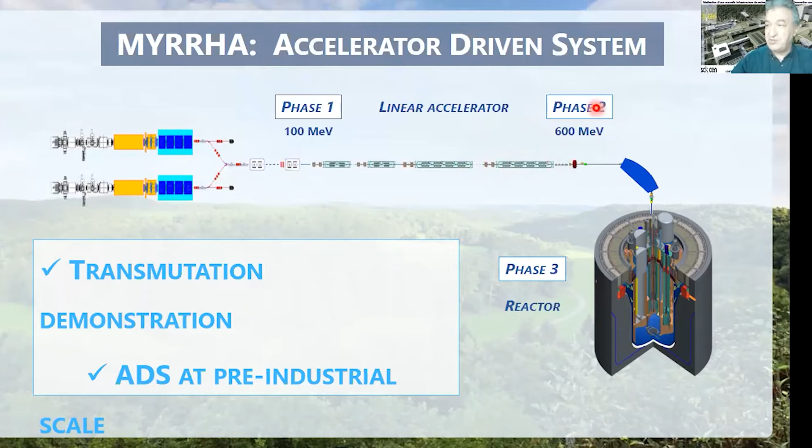We couple it to an experimental facility - I'll come back on that. Phase two is upgrading the accelerator to 600 MeV, and phase three is the reactor.

So the portfolio of applications of this ADS MYRRHA experimental machine is manifold: medical radioisotope production, fission energy Gen 4 systems where we look for materials we could need for these futuristic systems, and fundamental research thanks to the large accelerator we have. Fusion material is also a big challenge, so we create conditions where we can test materials for fusion.

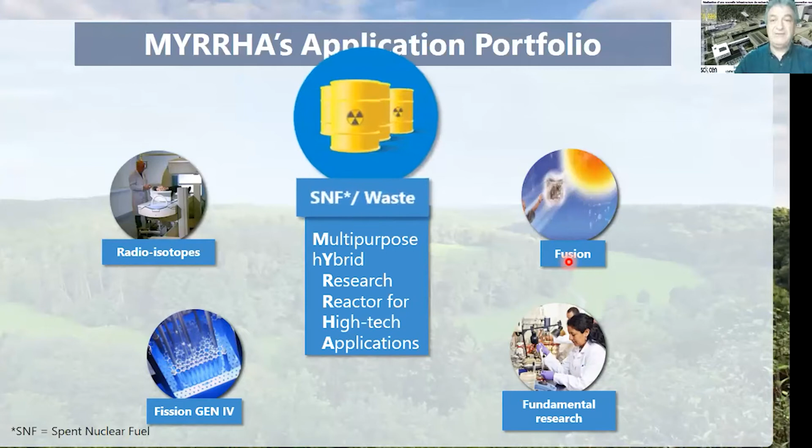But the major application, the flagship application, is the treatment of spent nuclear fuel or nuclear waste. What we are willing to do, actually - when we use nuclear fuel in our power plants today, in thermal reactors...

We are using oxide fuel containing uranium-235 and uranium-238, with an enrichment ranging between 3.5% to 4.5% of uranium-235. When you shoot neutrons on this U-235, you create a fission that gives you two fission products and, on average, about 2.3 neutrons.

And one of the neutrons, you would like to keep it to make the next fission. That's why we speak about a chain reaction.

But we have the other isotope of uranium that can capture a neutron and become a heavier element. The heavier elements we create are, first of all, neptunium, which decays to plutonium, then goes further to americium by capturing a neutron, and curium. Plutonium we call the major actinide, and these three others we call minor actinides.

These minor actinides, and also plutonium, are a burden in the nuclear waste if you are not doing reprocessing. Some countries do reprocessing, some don't, but you can retrieve the remnants of uranium in your fuel and the plutonium and reuse them to make fuel again. You leave in your waste flow the minor actinides plus the fission products.

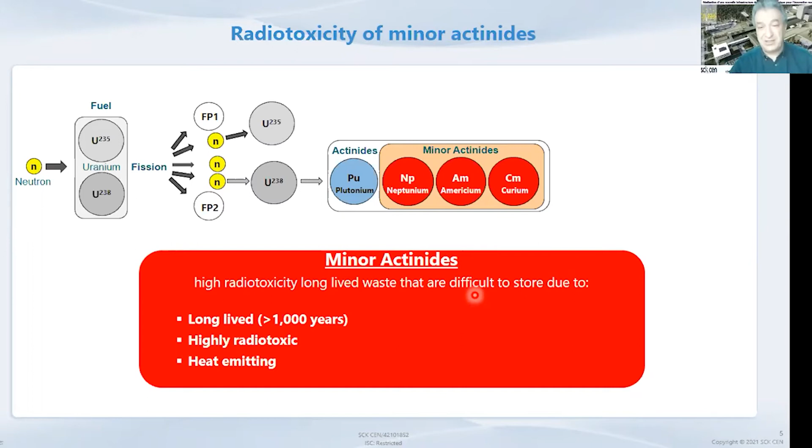These are the ones causing us very high radiotoxicity and also a heat load in our nuclear waste, which then conditions the dimensions and footprint of our geological disposal, if we go to geological disposal.

And how this translates: as I said, putting uranium ore in our present day reactors increases the radiotoxicity by a factor of 1,000. You can't do anything about it, that's the way it works. If you just take that used fuel and put it underground, it will take about 300,000 years to get back to the original radiotoxicity of the uranium ore you took from nature.

You do reprocessing, meaning you retrieve uranium and plutonium and refabricate new fuel with that. This is an existing technology, there is nothing to invent, it is applied in various countries. We applied it in Belgium during a certain period.

We applied it in Switzerland, MOX in the reactors. We do it in France today. We have done it in Japan. So this is in light water reactors.

But originally, the MOX was foreseen to go in fast reactors. We didn't develop the fast reactors rapidly enough, so we said we can already start doing reprocessing and recycling in the existing reactor technology.

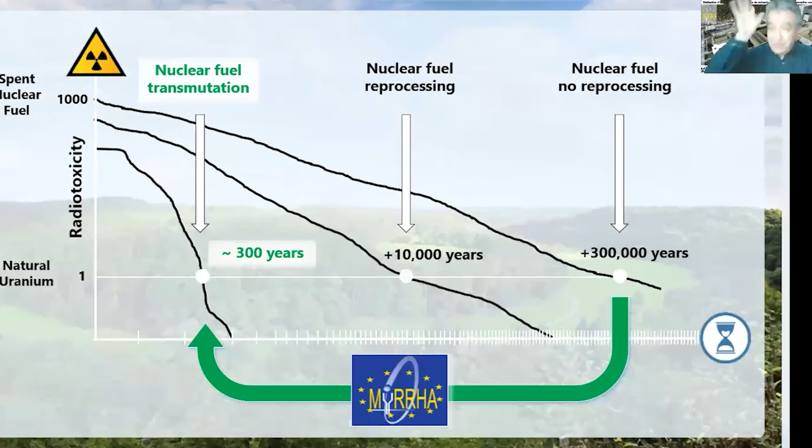But today I will not lecture about the transmutation and the waste management. I wanted to focus on the accelerator specificity for ADS. These are the characteristics of the MYRRHA accelerator: 600 MeV, 4 milliamp, but CW.

And this is, you can say, technology that exists today and we use it for this kind of application, but CW high current like this, and not in pulse, that is what is tricky for us.

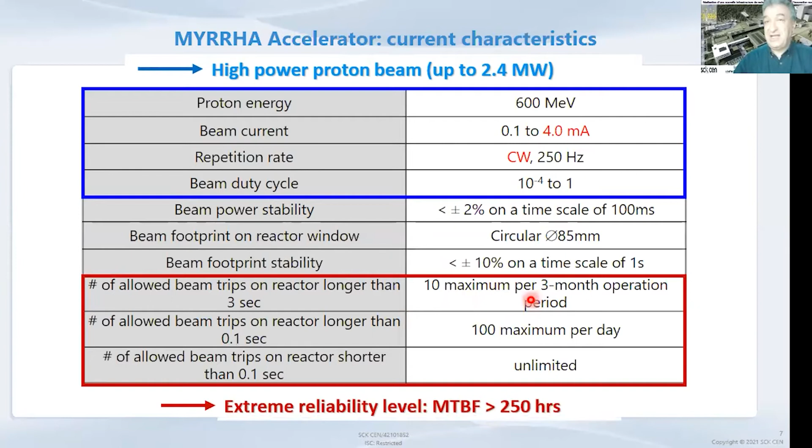And even more demanding is the reliability of the beam we are requesting. Because as I said, if we shut down our accelerator, the reactor will stop, so we are not making any transmutation then.

Today when we look at the large accelerators like the one we are willing to realize, if I look at J-PARC, we were monitoring the number of beam trips there, as well as SNS in Oak Ridge. We found that compared to what we are demanding in beam trips longer than 3 seconds, where we would like to have 10 maximum per 3 months of operation, we are 2 decades below what today's large accelerators are doing. So we need to improve this reliability drastically.

Shorter beam trips we can manage with the thermal inertia of our reactor. But these longer trips mean what we call in classical reactor jargon a scram, an unforeseen shutdown of the reactor. Then you need lengthy procedures to respect from the safety point of view, and it can take between a few hours up to 2 days before you can restart.

And if I take J-PARC or SNS, they trip about 2,000 times per year. This means if I just take half a day to restart, I would need years on Earth of 1,000 days, which is not the case.

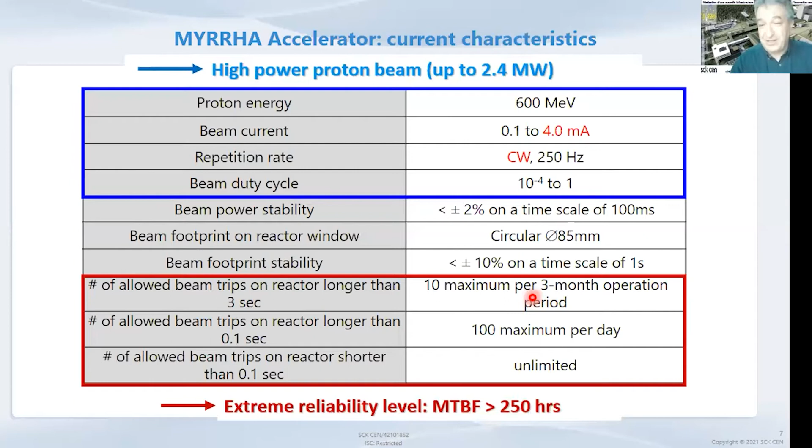So we need to improve this reliability. And so the idea to improve...

I don't know what happens with this slide. It was supposed to be... let me see, why it doesn't show... sorry.

Oh, the figure disappeared.

I apologize for this, I don't understand. It was working just a few minutes ago.

But nevertheless, that gives you an idea. We have larger accelerators in terms of current and energy, but there are existing machines of the kind we are targeting to make. So what we have decided to do is to demonstrate this reliability. We worked very hard on the individual components. I will come back on this.

But what we decided in 2015, we said we will create MYRRHA in 3 stages. Phase 1, the accelerator up to 100 MeV, but with 1 injector line, not 2. The double injector is to create redundancy in the low energy part to achieve this reliability we are targeting. And from 17 MeV to 100 MeV, we will go with spoke cavities. I will come back on this.

And then from here with niobium elliptic cavities, maybe in this part between 100 to 200, we are watching what's going on in the ESS project with the double spoke cavities that they are testing for the moment, if this can do the job. And the idea is to have the first experimental facility built by 2026 on the site of MOL, and then go further for phase 2 and phase 3. Spreading this investment will reduce the technical risk about the reliability.

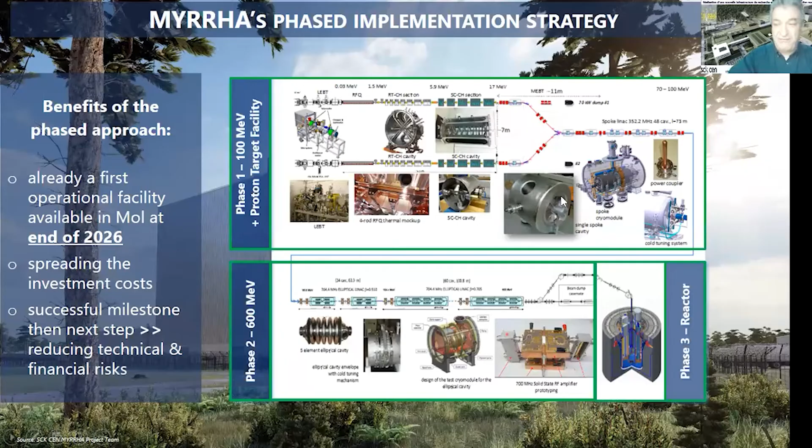So the fault tolerance, we apply it up to 17 MeV by redundancy. So duplicating the injector up to 17 MeV, and we switch between the 2 injectors. We keep the second one in hot standby, but we operate only with 1. And if we lose the injector, we switch on the second one instantaneously.

From there on, serial redundancy will be applied in the superconducting spoke cavities. We have many identical cavities which are in series, but we do not exploit them at full capacity. We derate those cavities to, let's say, 70–75% of their maximum capacity. And if we lose a cavity, then we do a local compensation, but we then need a very rapid adaptation of the adjacent cavities in terms of gain in acceleration.

And so this will allow us to reach the beam trips we are targeting, of about 10 at maximum in 3 months. You will ask me why 3 months? 3 months is the operating cycle of the MYRRHA subcritical reactor. And we wanted in that 3-month operation at maximum 10 scrams, if I can call them this way in my jargon of reactor people, which is still high, but for an experimental machine, it's okay. We can live with that.

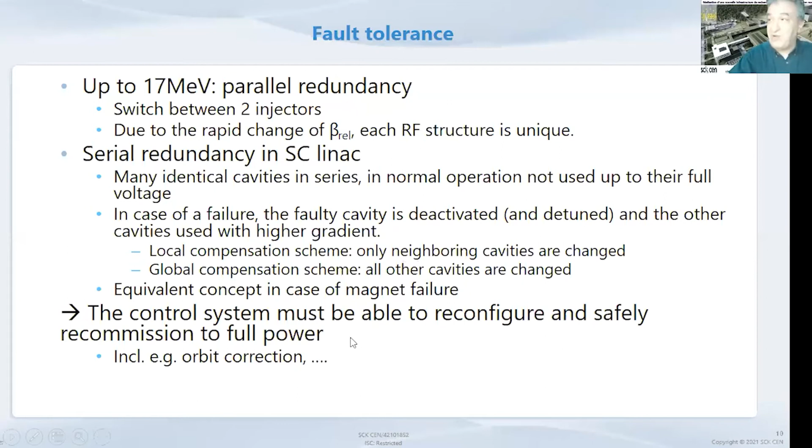And to demonstrate that, as I said, we will build stage 1, the 100 MeV accelerator with 1 injector. And all the components have now been created, prototyped and tested. This is the ECR source you see. It is now operational at the site of Louvain-la-Neuve, with the low energy beam transport line.

The RFQ has been designed together with the German colleagues from IAP Frankfurt. These are with the colleagues of Polytechnique for the source and LEBT with LPSC in Grenoble. The CH cavities also with IAP Frankfurt and Bevatech. We have designed them and prototyped them, and this is already operational in Louvain-la-Neuve. We are busy with the CH cavities to install them also in there.

From there on, we go for spoke cavities. We have 2 spoke cavities per cryomodule. We prototyped those, we tested them individually, and now 2 other new ones have been prototyped that will go in a cryomodule for testing in the prototype cryomodule, which is also created.

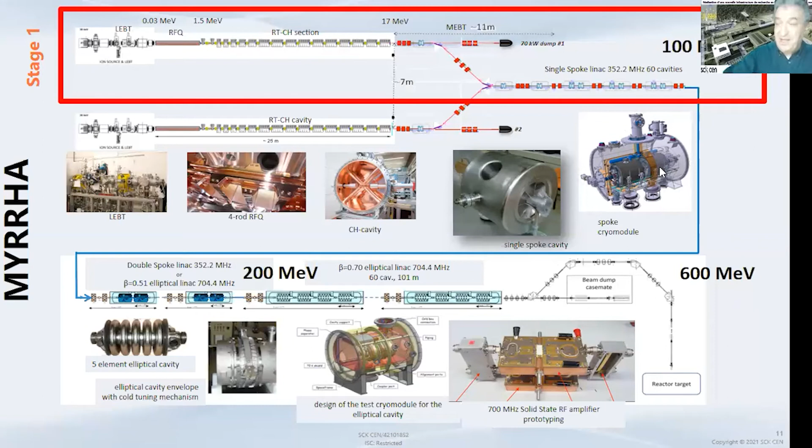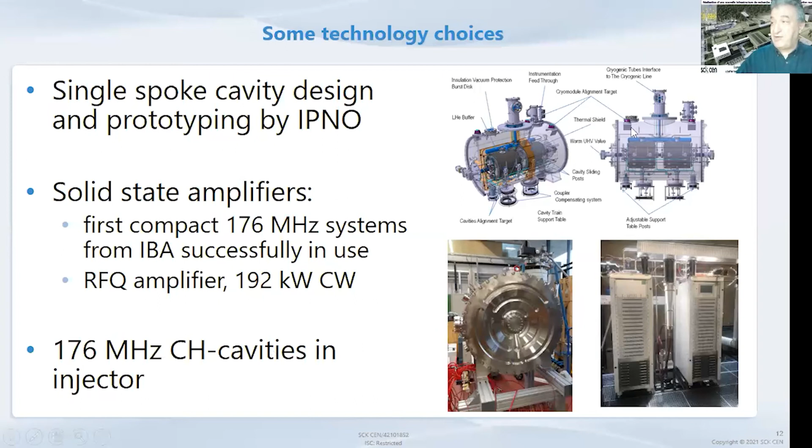So the single spoke cavities were designed and prototyped by IPNO in Orsay, as I said, and the solid state amplifier, first compact, 176 megahertz from IBA. These are solid state amplifiers, and also the CH cavities for the injector have been prototyped. The cryomodule is also now prototyped. I will come back later on this.

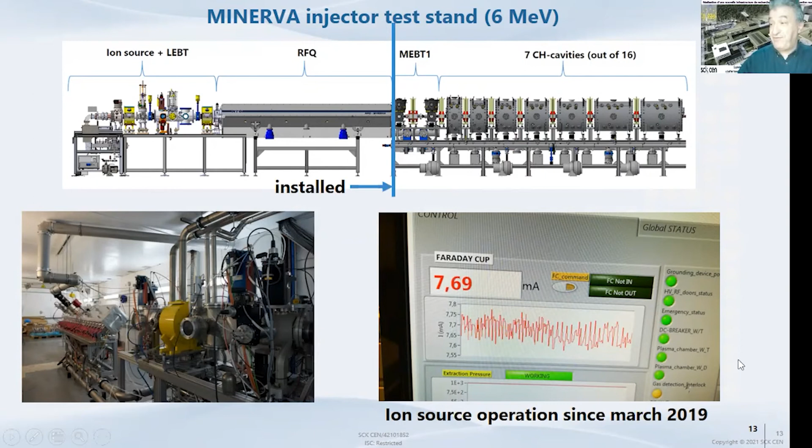So this is installed already in Louvain-la-Neuve, and the CH cavities will be tested also in there. You see the casemate where we are in Louvain-la-Neuve, the ECR source and the RFQ, and normally we can go further there with the CH cavities. This is the first ion source operation in 2019.

Then this is the PTF as it will be looking, the proton target facility. You see the entrance of the beam.

Sorry, I have to activate back my laser.

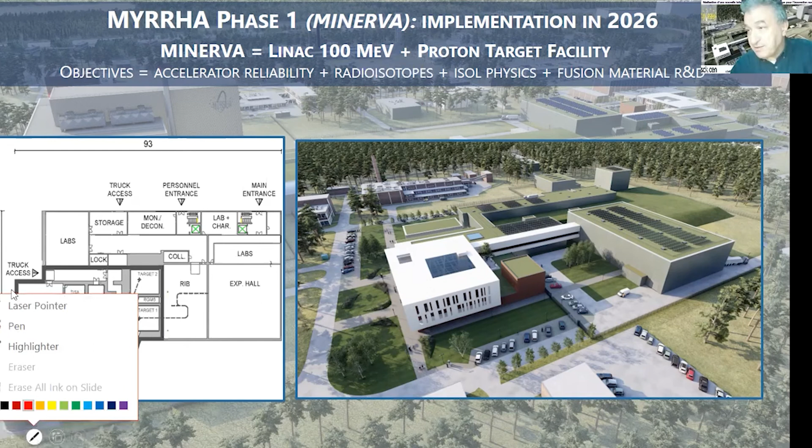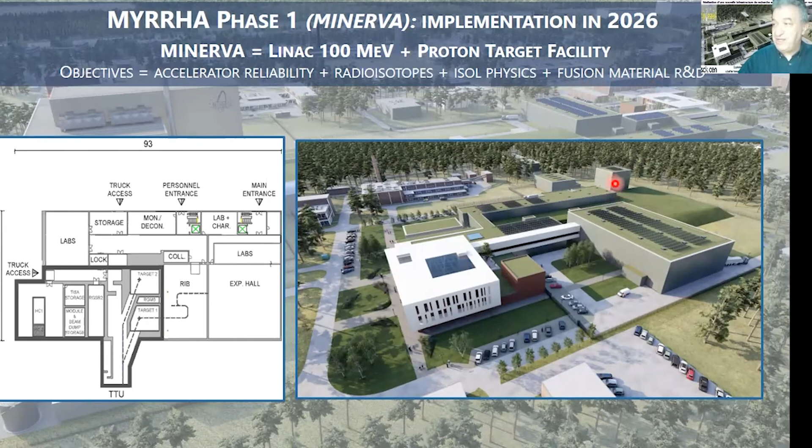So the beam line is going further on towards the reactor, which is over there. And here we enter in the PTF, and we will have a radioactive ion beam, an ISOL system, as well as normal irradiation with protons. And we have an experimental hall in this building. We will have a fusion target also in a separate building, because here we do fusion material; it will be combined with our full power beam dump.

This is the footprint that we will be having. What we call Minerva is phase one of the accelerator, the PTF and the full power beam dump, also combined with the fusion target. And then later on, stage two, the MYRRHA accelerator continuation. The RF gallery is in here. Then the reactor building is over there.

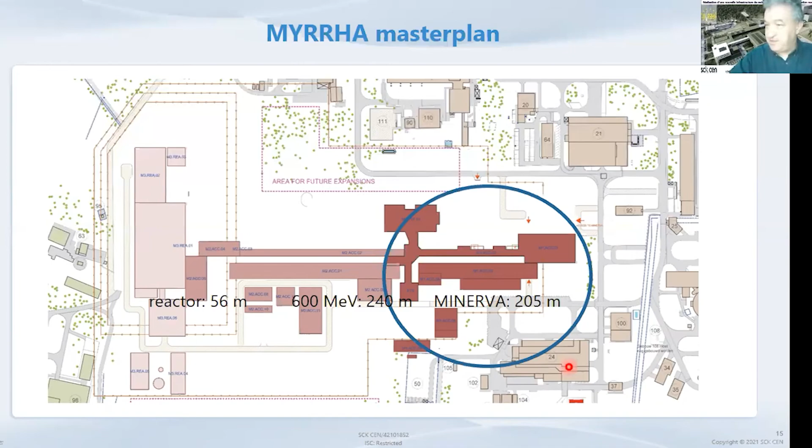This is how it will be implemented on our site, the master plan. Those are existing buildings, and our BR2 research reactor is over here. And these are the material testing labs, hot labs, like at PSI, Andreas.

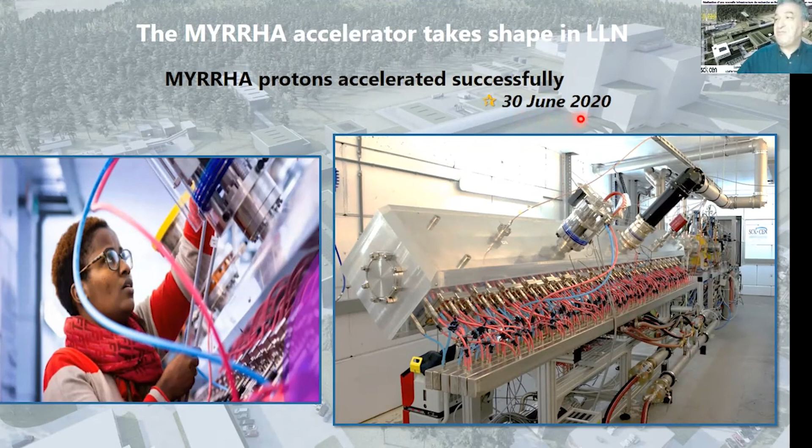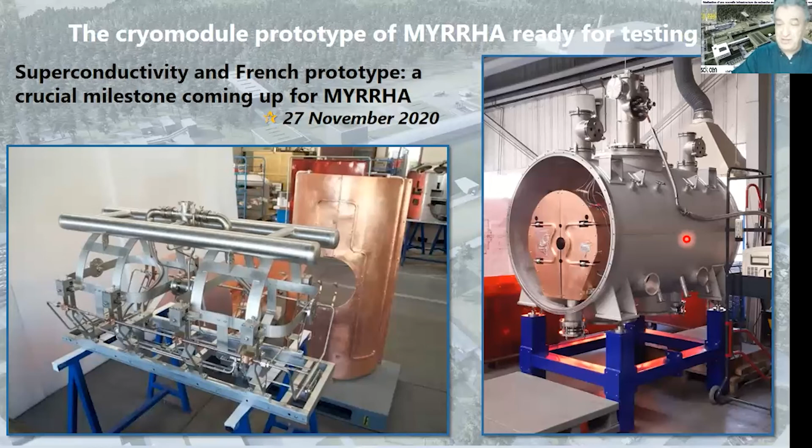So the RFQ was installed, and the first protons were accelerated on the 30th of June 2020 already. Then last year, despite COVID, we could successfully create the prototype of our cryomodule with French colleagues of SDMS. And it is now shipped to the lab where the testing will be conducted. It's also in France.

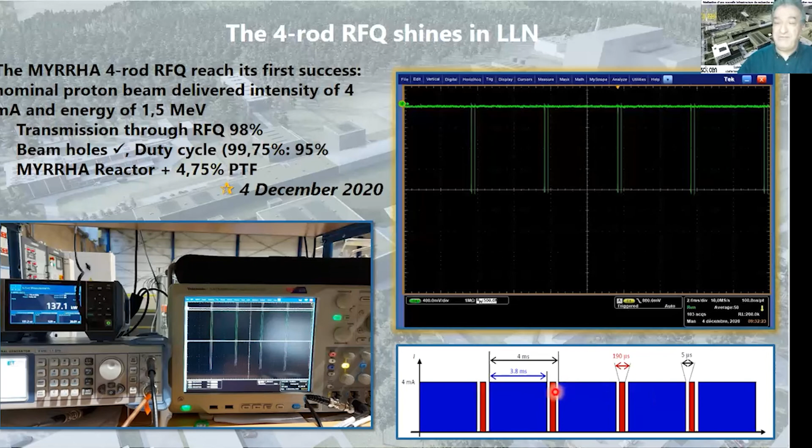And the testing of the RFQ at the conditions of MYRRHA was achieved in December last year, where we showed that we can accelerate up to 1.5 MeV at the exit of the RFQ with transmission of 98% through the RFQ. The beam duty cycle is what we were expecting, and also these holes: I told you it's CW, but every 4 milliseconds we need a hole in the beam of about 200 microseconds, needed for measuring the subcriticality level of our reactor. And we showed that we can do this correctly with our accelerator. So all this is very promising.

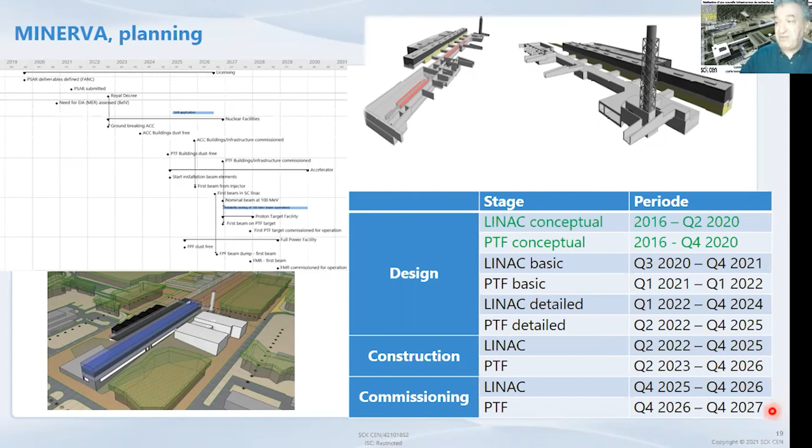Well, now depending on the impact of COVID, we are seeing some delays, so we are assessing how much delay this will cause. And then we normally foresee that the first protons get out of the LINAC by the end of 26, and their use in the PTF by the end of 27.

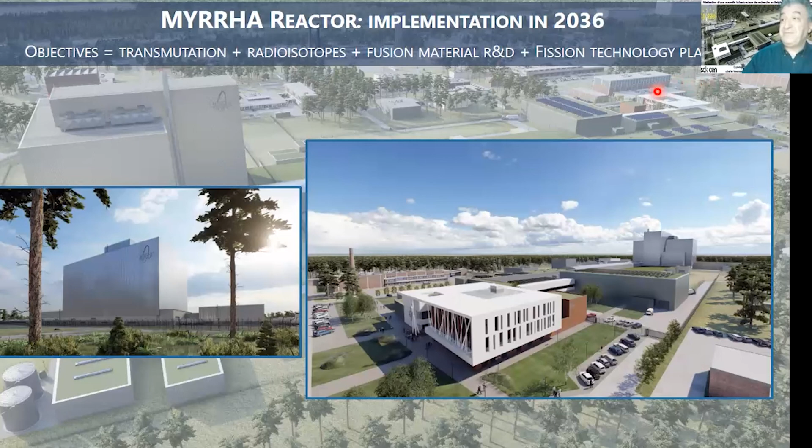The reactor, we are not forgetting it. As I told you, we are working on it also. And the purpose of the reactor is a series of works: transmutation for sure, radioisotope production in that facility, fusion material R&D, and a fission technology platform for the lead bismuth reactor technology. And the purpose is that it should be operational by '36.

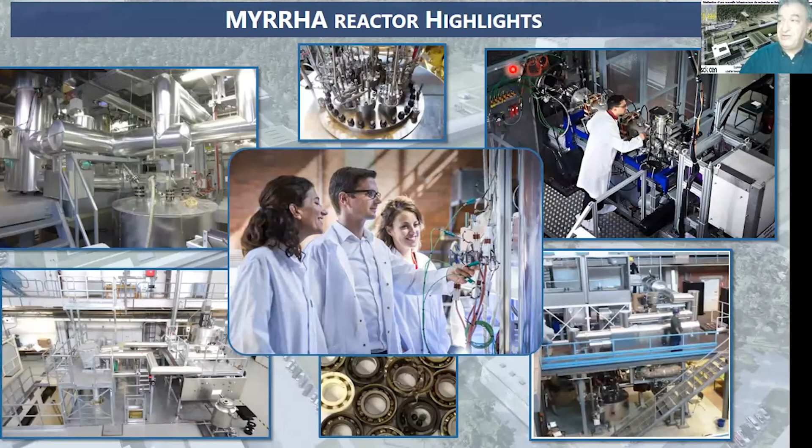And there are highlights and progress. Due to the time limitation, I should be careful. We have many infrastructures built in our technology hall for the reactor lead bismuth technology. This is what we call the baby MYRRHA. We have already a zero power reactor with lead coupled with a neutron generator. We use DT reaction instead of spallation reactions in the center of this zero power reactor. It's about 500 watt, where we do all the physics we need for validation and verification of our design codes and for the licensing of the MYRRHA reactor.

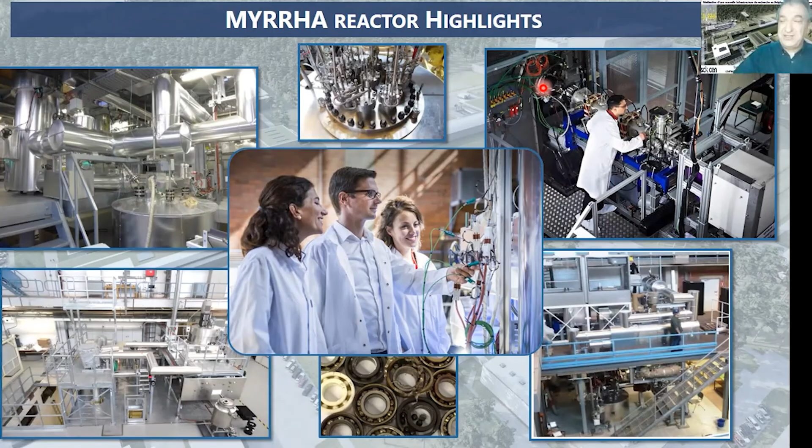By '24, we finish the costing of our new design with uncertainty, and then we can enter in the preliminary safety assessment report preparation. We will be also doing the pre-licensing in this period until '24. We have defined that with our licensing authority. We are doing that since 2011 with the objective that we get an opinion from the safety authority somewhere around '26.

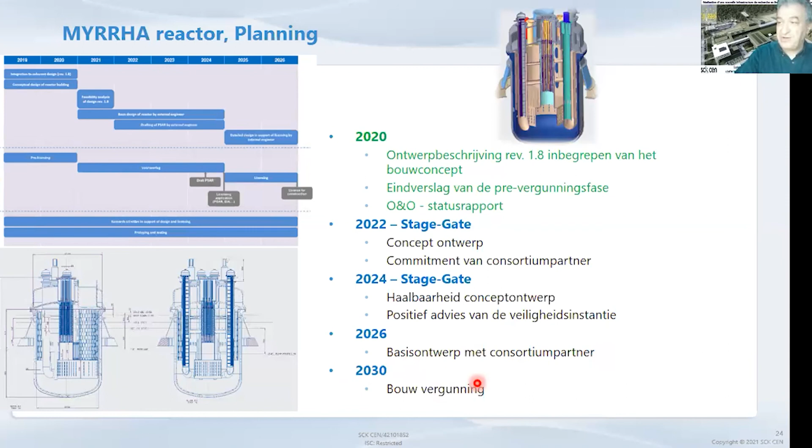And then we can enter in the basic design of all the facility with the help of a consortium partner that we need to secure by 2022, with the objective to have the decision for the construction permit by 2030.

We are on the ESFRI roadmap, and we are in the final assessment to qualify as a landmark. Hopefully this will go well, and we are having our last hearing in 2 weeks from now, or 20 days, on the 26th. We are also in the SET plan, and we are also embedded in the national equivalent programs: the National Pact for Strategic Investment of Belgium, and also the Integrated National Energy and Climate Plan that we submitted to the European Commission as part of the Belgian contribution to the energy and climate plan for Europe.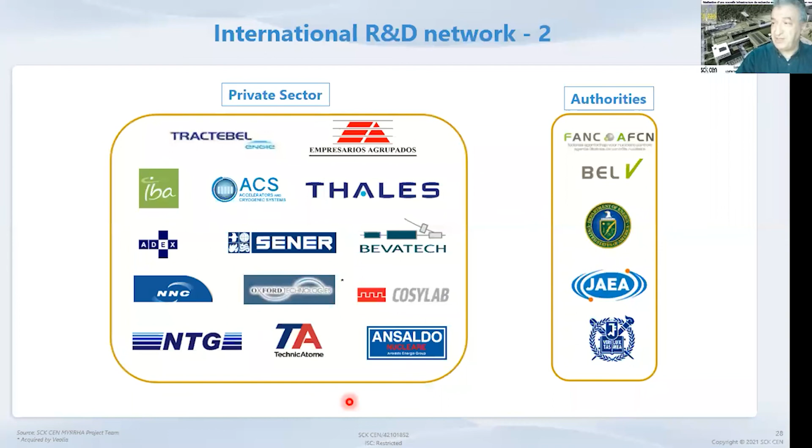We look to break the ground in '22 already with phase 1. And despite the fact that we are going out of nuclear energy today, Belgium is very keen to hold competencies and know-how in nuclear in the country, not only by theoretical education and training, but also with a very strong research program sustained by such an ambitious investment in the field.

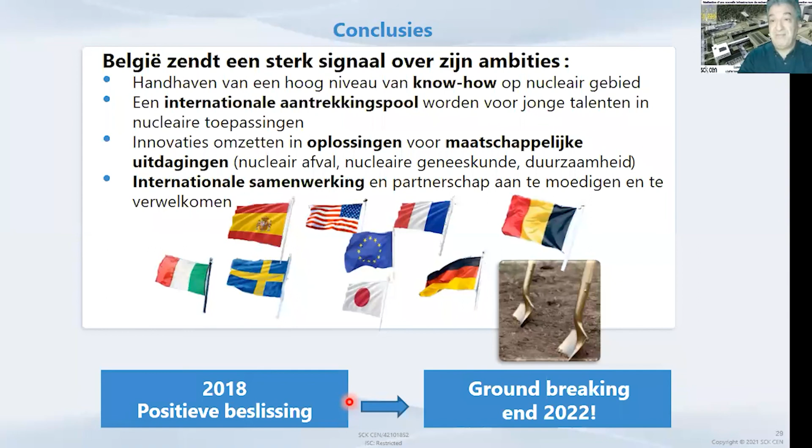But looking for solutions to society challenges such as nuclear waste or nuclear medicine and treatment, and also calling for international collaborations. Therefore, we open this project for participation from international partners. And the AISBL that I am talking about is in the final stage to be created. Hopefully, within a few months, we will be making the announcement and inviting countries to enter with us.

We wrote with my colleague Jean-Paul Poncelet a book on MYRRHA. This is in French, published by the Royal Academy of Belgium, but we are preparing a version in English, MYRRHA, another look on nuclear energy. If there are French-speaking people, you can get that book. If you are English-speaking or Dutch-speaking, you have to be patient still 1 month and you will get it.

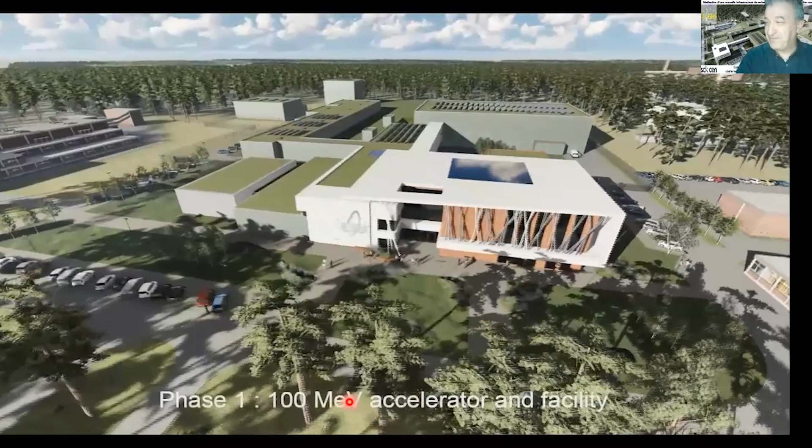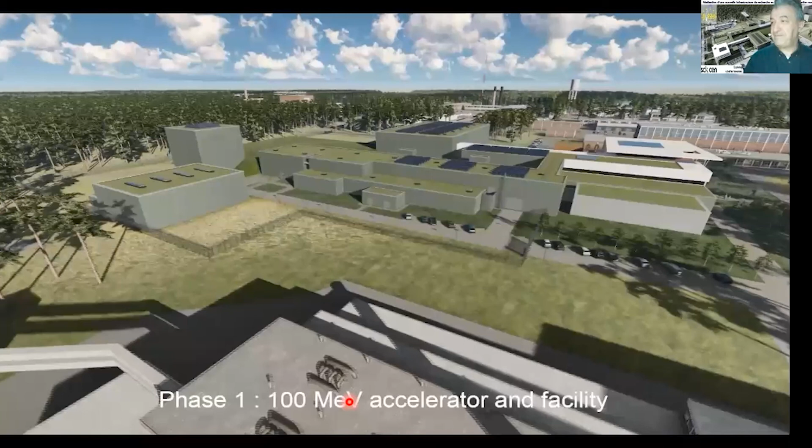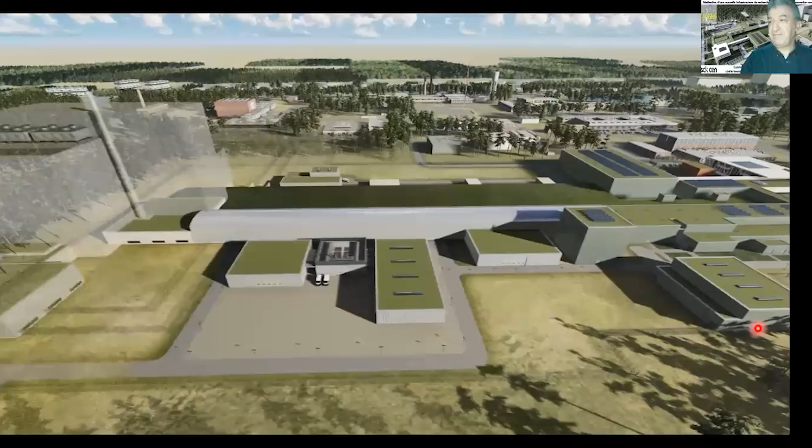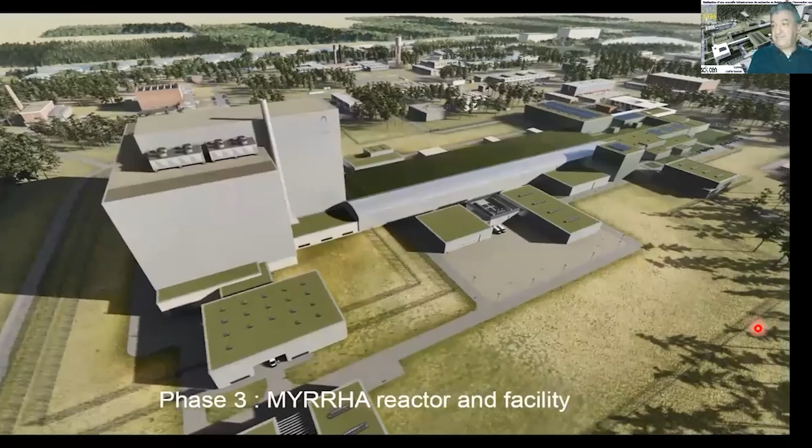So now I invite you to a little walk in the future. Voilà.